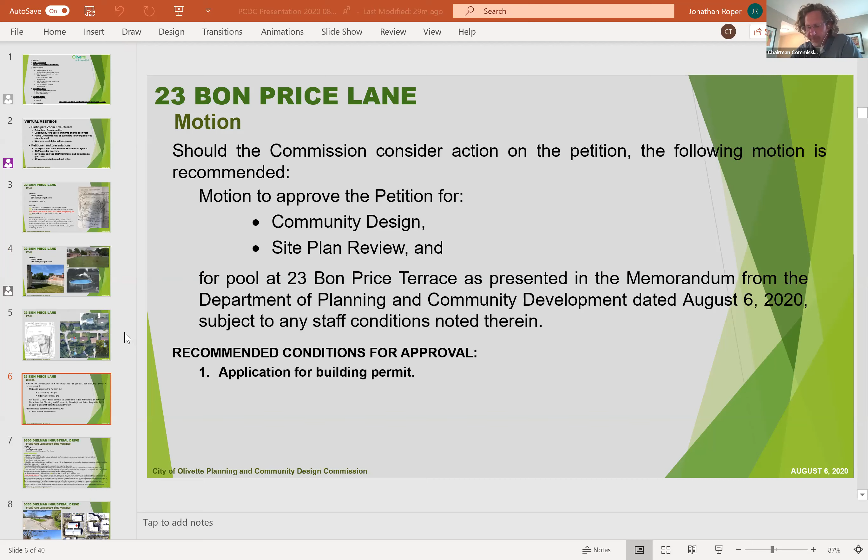Jonathan, I have one question right off the bat - is this an above ground or below ground pool? It's an above ground pool, as the one you see in the bottom right here. Okay, just wanted to confirm that, just wanted to make sure.

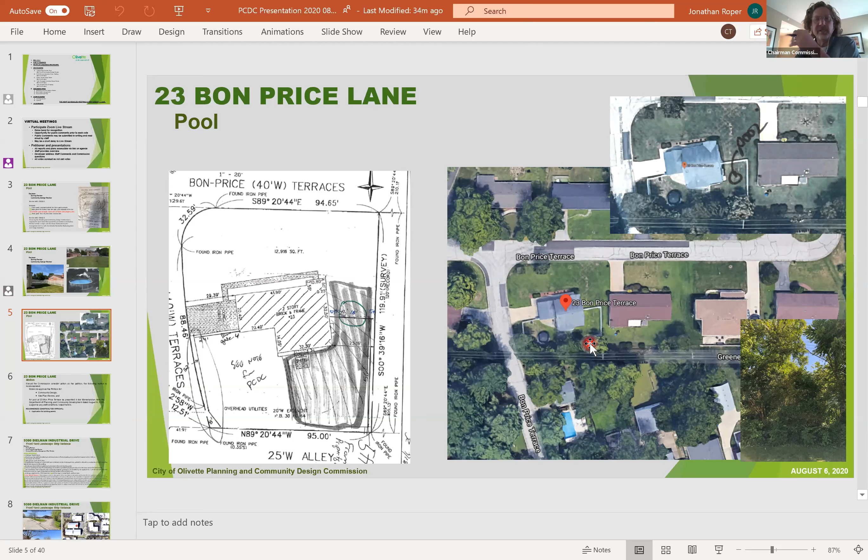I have a question - what is on the other side of the lot? It looks like a circle on it. What is on the other side of where you suspect the pool to be in the backyard?

Which side, sir? I'm looking at the Google Maps of it. It's on the opposite side. It looks like there's a big circle. Is that a trampoline by any chance? Are you talking about this circle here? We have a trampoline on the other side of the house, on the front side, close to our driveway.

Okay, and then my other question is, couldn't you bury that line? We cannot bury the line. It's an Ameren line, it just moved across.

That's all I have, sir. My question is similar to Tim's. Why can't you move the trampoline to the other side of the house and put the pool where the trampoline is?

Where the trampoline is, behind it, is the Ameren electric wire. Ah, okay, thank you, ma'am. Now I understand.

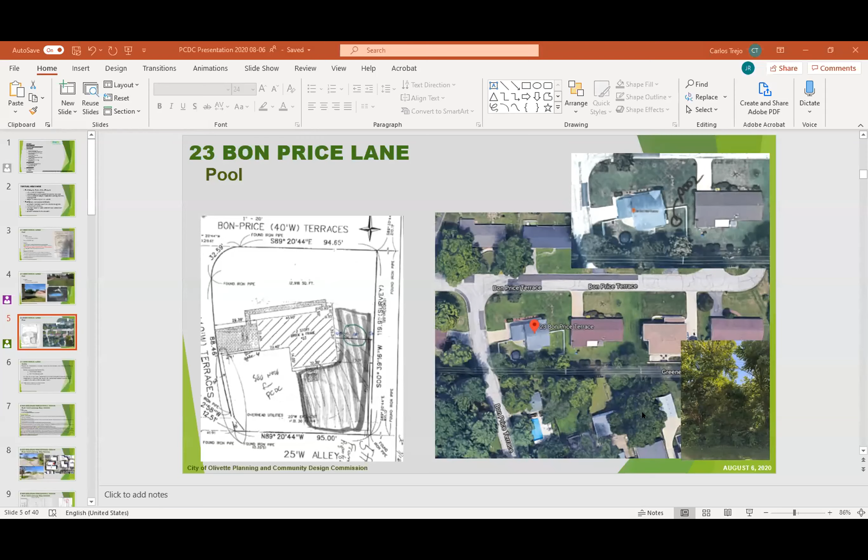I thought the trampoline was away from the wires. If I'm incorrect, let me know. The trampoline can be moved around, but the pool cannot be moved. If the kids want to play on the trampoline, we move it close to the entrance from the driveway, but the power line that runs behind the house, many people are always there all the time, so we really need to give consideration to them doing their job in that place.

Is the trampoline in the easement? What do you mean, sir? Easement? Is the trampoline in the Ameren easement? No. I think if I understand correctly, the petitioner likes the trampoline in that location because they can move it around. So if they're not using the trampoline, they move it away so they have more yard. Would that be a fair statement? That we have more yard. We have more yard.

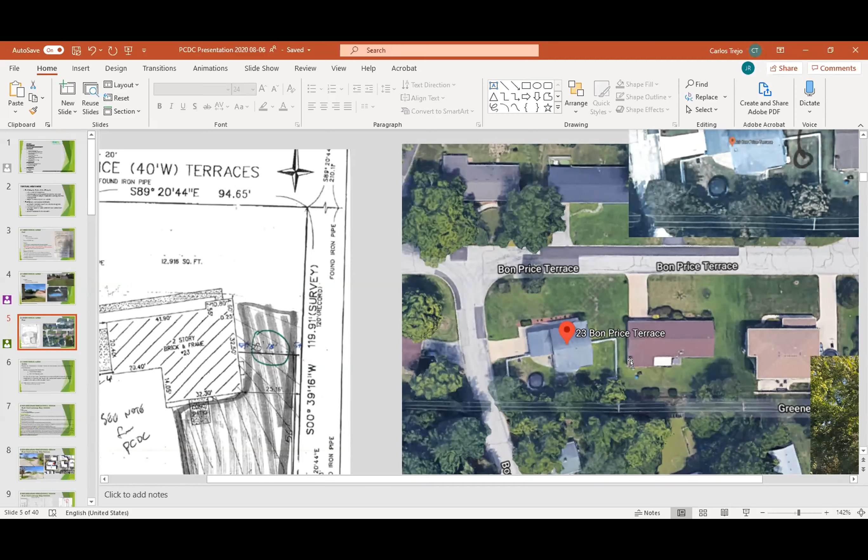Mr. Chairman, go ahead Carol. I think, if I could speak for both of us, what Tim and I both appear to be asking is why the petitioner can't move the trampoline to the other side where they want to put the pool, and put the pool where the trampoline is. So then that would allow it to go for the variance. We just need to get it explained for the record, in particular, why that cannot happen.

Ms. Badness, can you answer that question? The pool, even though it's above ground, is going to be a permanent structure, but the trampoline is not permanent there. If the trampoline is moved back, it's going to be close to that power line.

No, that's not what we're asking. Yeah, so what I'm saying is, if we try to pull the pool down, the pool will be close to the edge of the fence, edge of the backyard where the power lines are. And the pool people said they cannot do a pool close to where there is a power line.

So you've already asked the pool people if the trampoline wasn't there, and the pool was in the location desired to be where the trampoline was, the pool people said that they still could not put it there. Is that correct? Yes, sir, we did.

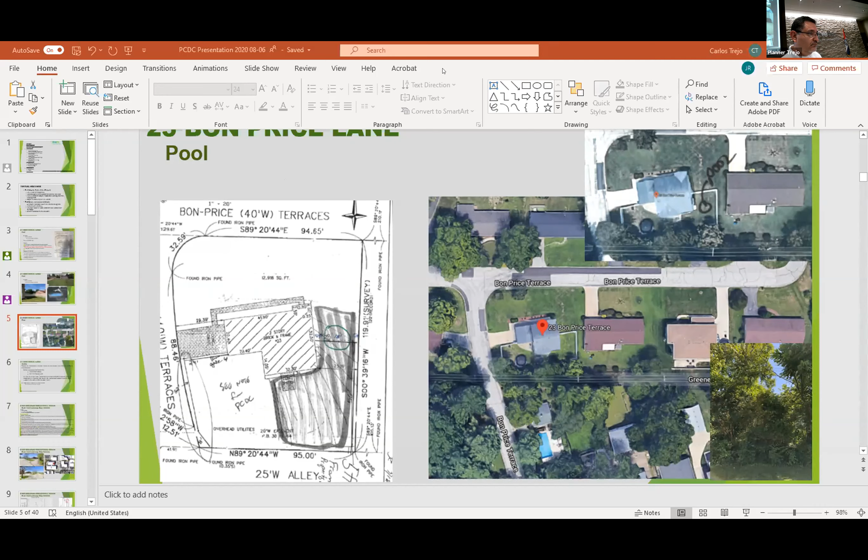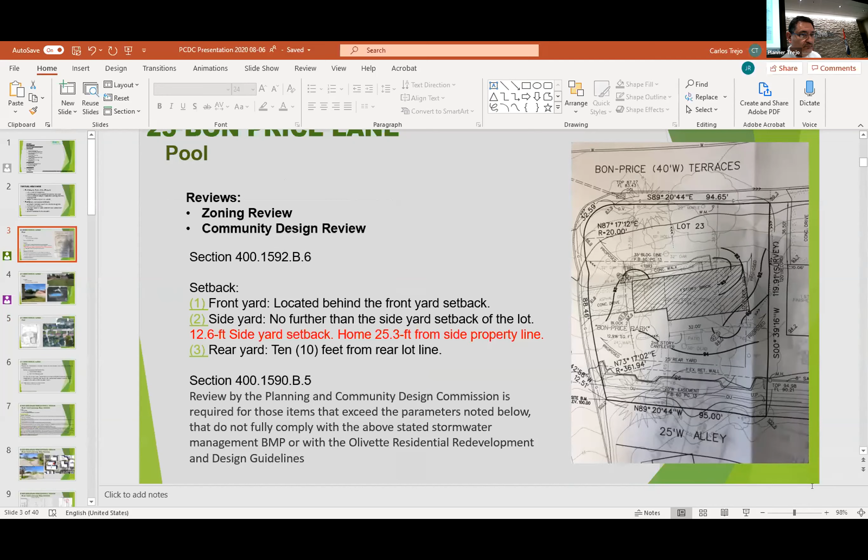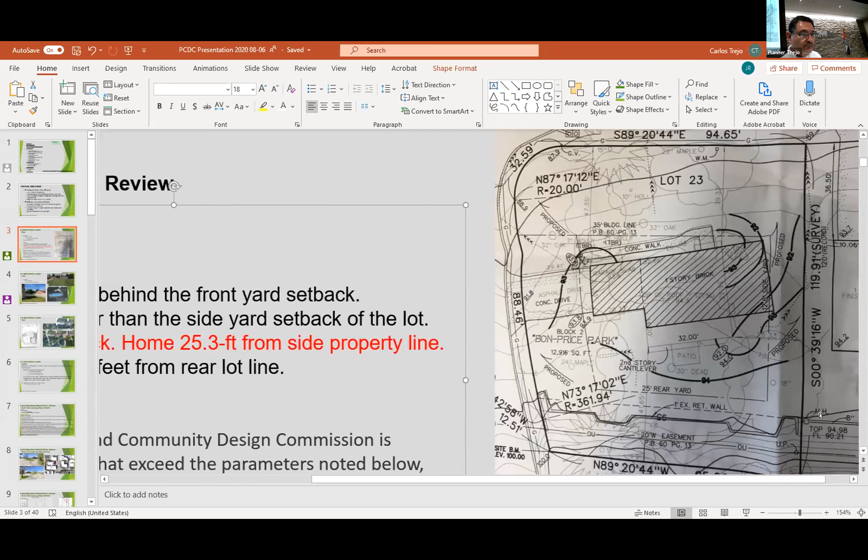Understood, thank you, I appreciate the answer. Okay great, if there aren't any more questions, do I hear a motion?

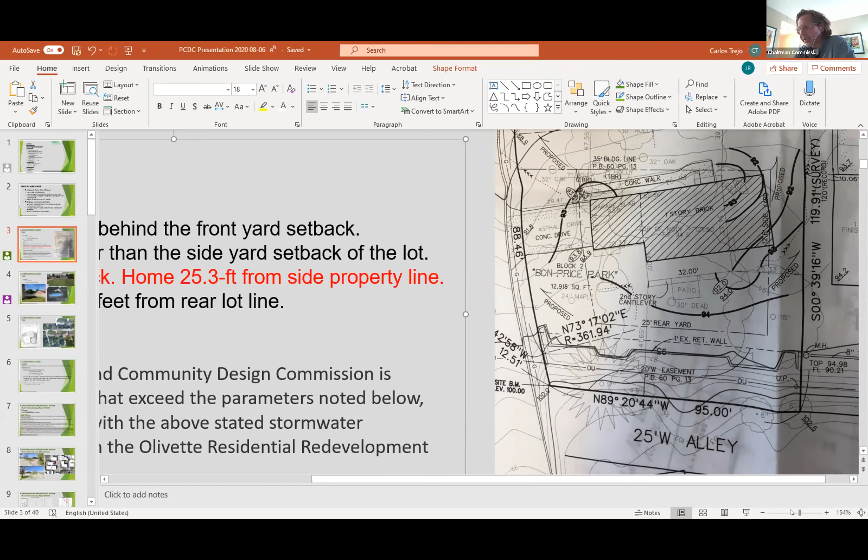Great, do I hear a motion or is there any more comments? Mr. Chairman, I'd like to make a motion. Go ahead, Carol. I'd like to motion to approve the petition for community design and site plan review for a pool at 23 Bon Price Terrace as presented in the memorandum from the Department of Planning and Community Development dated August 6, 2020, subject to any staff conditions noted therein. Motion's been made, do I hear a second? I'll second. Motion's been made by Carol Wagner, seconded by Richard Brophy.

Question, Carlos - since this is a variance request, do we have to include that variance request in this motion? No, Mr. Roper had indicated it's not a variance request for the accessory structure code. It's just that administratively, we don't have the authority to approve the pool at that placement in the setback area. We used to have that authority, but because of the placement directly behind the house, when we amended the accessory code, we made a decision to leave that to the commission through the site plan review process. So there's not a justification for a hardship - it's just a review by the commission to determine whether there's any internal or external impacts that this placement would have.

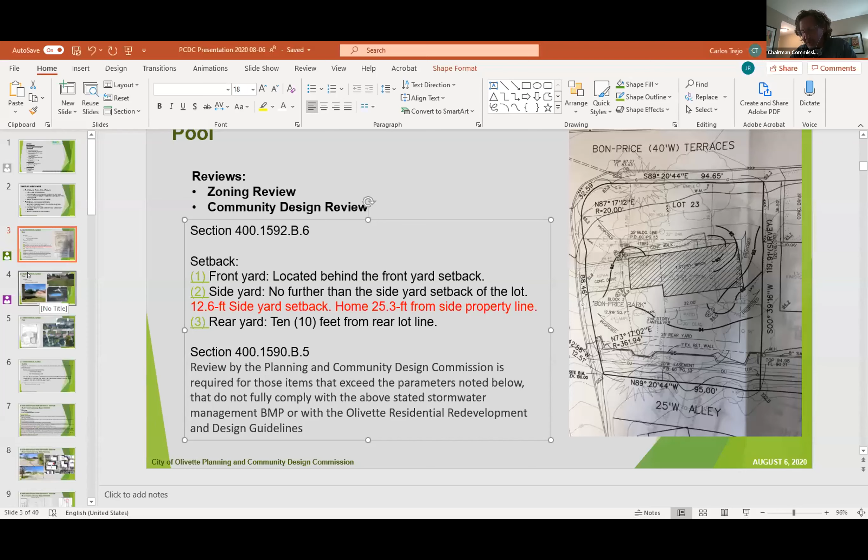We'll move on to item B, which is 9300 Dielman Industrial Drive. Petition type is a variance under site plan review. The variance request is to reduce the required 10-foot landscape strip along Dielman Industrial Drive. The petitioner is Troy Duncan, owner of PK Construction. Property owner is PK Construction Building LLC.

Who's handling this, Carlos or Jonathan? Jonathan, I will take it, sir. Thank you. And I'm going to have to share my screen. Oh, it should be. Or if I can share mine, you have at the top share. For me to share mine. Ah, I see.

All right, bear with me one second here. And could you move the people? Thank you.

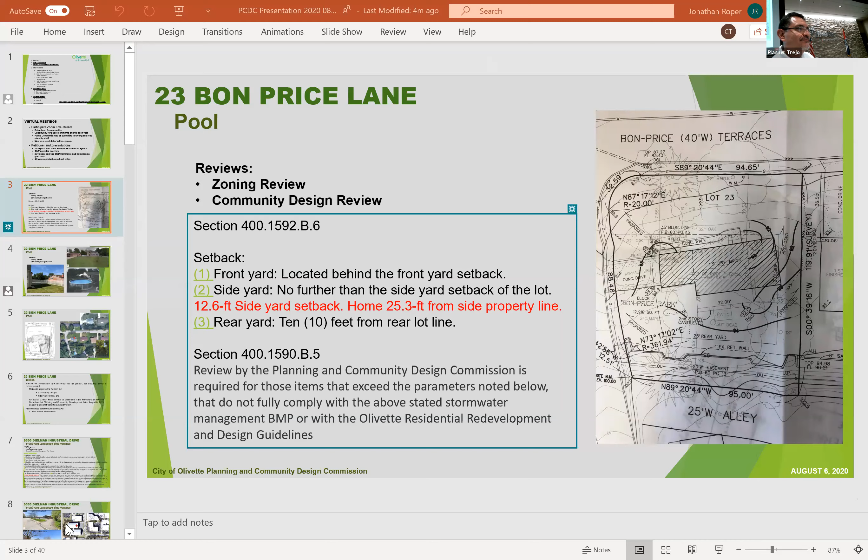Members of the commission, we have the second petition for the evening, which is an off-street parking variation, actually a true variation. Whenever there's a variation, there's a section on your staff report, also on the screen here, that talks about practical difficulties, that they're allowed to vary the conditions of the off-street parking codes so long as to create conditions for both safety for pedestrians and vehicular traffic.

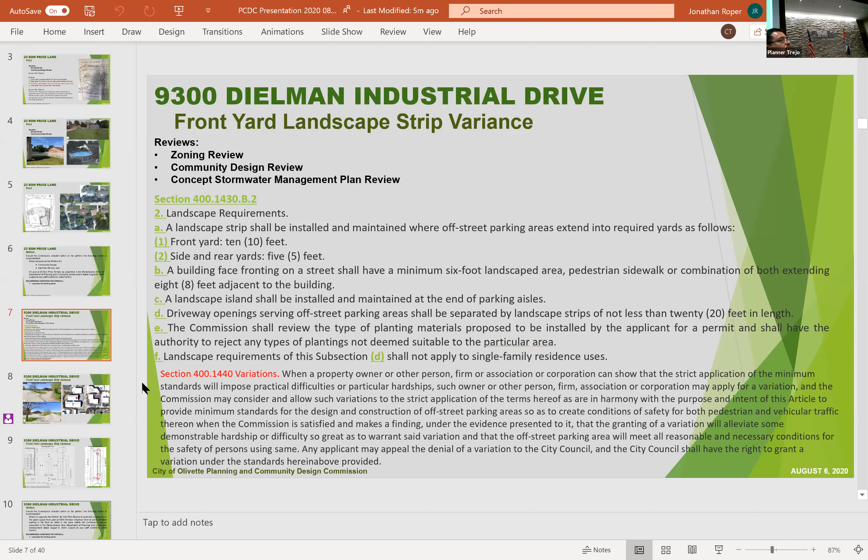So PK Construction decided they're doing major renovations at their property, and you could partially see some. They're just north of the City Hall building at 1140 Dielman Road, where Carlos and I are right now, but they're just north of us in the industrial park. These are the views of the property as they stand today.

They're actually renovating the property, which consists of two buildings. One's an interior building and one was used as parking. Prior to it being parking, it was a tennis club. So when the tennis club left, they made it into a parking garage, and now they're actually making it into, I believe, office space at this point. So they have a need for more additional parking.

The Dielman Industrial has a sidewalk on one side of the road, as you can see, and I'm going to make my pen a pointer in just a second. Where's my spotlight? There we are. So at this point, there's a sidewalk and there's a big green space with a few trees. It looks like the trees are actually dead, judging by the grass being green and the other trees not. So these might be actually dead trees, which staff will need to remedy, of course.

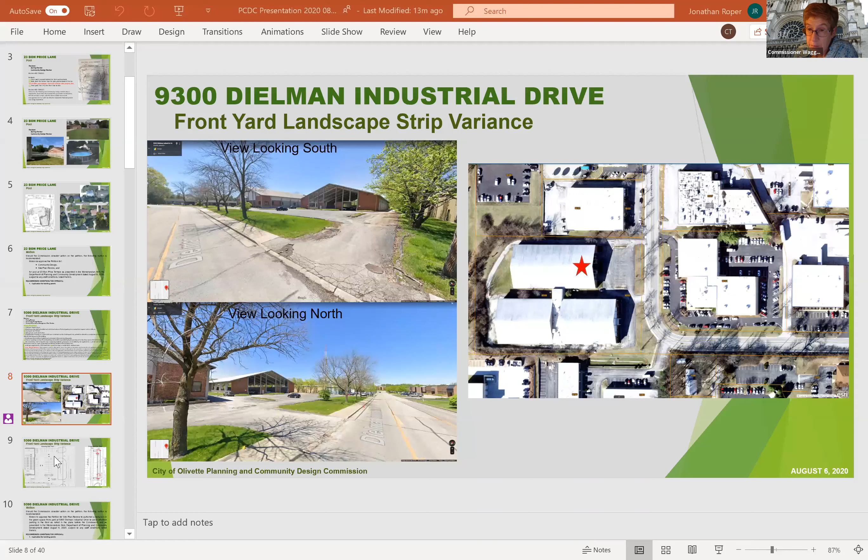Mr. Chairman, go ahead, Carol. I just want to clarify one thing. So along the strip they want to remove, we're talking about 19 spaces, is that correct? I'm checking the floor plan... might be 14 spaces. Right, about 14. Yeah, I show 14. Yes, it's 14, there's a thing right here.

Okay, Chairman, are you still on? I am, go ahead. I do not see a hand raised for the petitioner.

In there... you know, while we're waiting, potentially, I'm looking at another site plan that looks like it has a little bit more handwritten materials, and it looks like it's talking about almost like a landscaping plan, and it looks like it has 19 spaces, and I think that might be why Carol was questioning the issue.

Is that right, Carol? Not specifically, but I just wanted to clarify how many additional spaces they would be creating there. Okay, well I just wanted to clarify that, or at least point that out. Maybe I'm looking at the wrong drawing. No, it's right for dealing. I don't know, I'm going to put it on my screen. Jonathan, I'm not sure if that rings a bell for you as to which drawing this is. Yes, that is... oh, I'm sorry, it's not on the screen. Additional plantings, yes, that is correct. It's the one on the back of your plan set. I'll bring that up in just one second, my apologies.

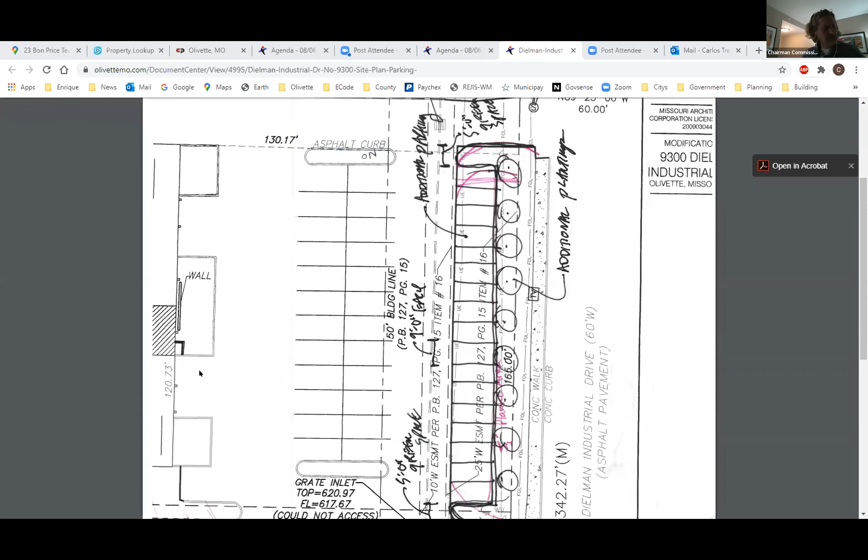That was the initial concept that was submitted before we got the hardline drawing without the additional plantings shown. So there were a couple things we discussed. One was the two apron openings, making sure they had a minimum of 3 feet at the island ends. I don't think the spacings were well defined at that point, before they got a civil engineer involved to draw the second drawing you saw on the dais.

So the drawing we were looking at before is the latest, correct, without noting the additional plantings they would do. Okay, so they're already planning on doing the additional plantings, so good.

Okay, so do we have a member available? Bear with me one second here, let me double check.

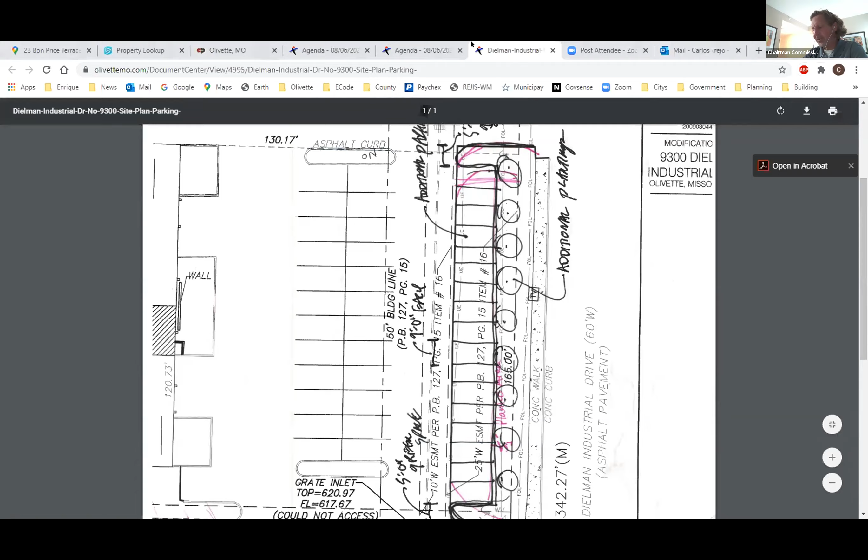Okay, great. So we'll go ahead and defer this for the time being, and we'll move on to item C, which is 508 North Warson Road. Petition type is a site plan. The description of the petition is a variance for fence height. Petitioner is Richard Kellner, property owner is Richard Kellner.

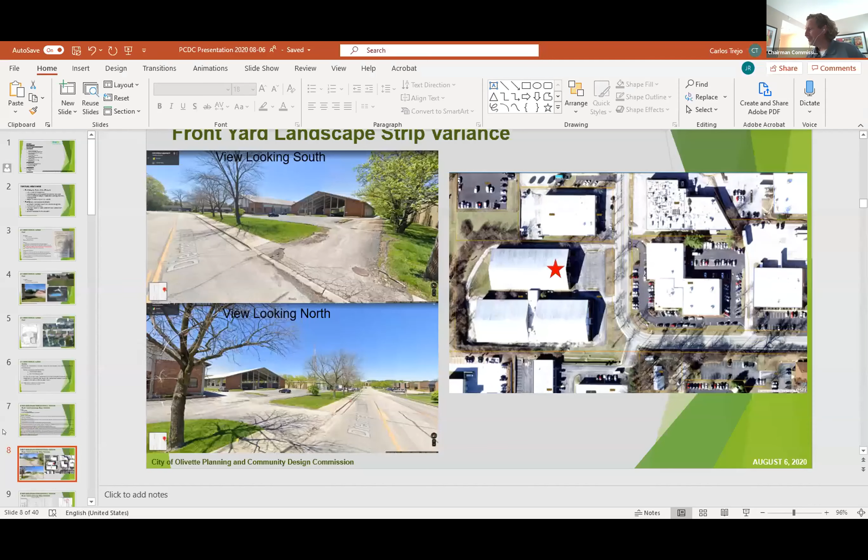Chairman, if you would bear with me, you're moving a little faster than... Oh, I'm sorry, let me get back here. Okay.

Before we go on to this one, I already had a discussion with Carlos regarding this petition. Apparently there were some concerns that some neighbors had, and there was a request for this item to be deferred because there's apparently an attorney representing some of the neighbors adjacent to this. Since we have some potential issues with neighbors, it would be my recommendation that we defer any decisions on this until we've at least heard from that attorney. We can go ahead and go through the presentation, but I'd like to ask Mr. Kellner if he wants to go through this petition at this point in time, knowing that it's likely we're going to defer it until we at least hear some of the concerns from the adjacent neighbors.

So Carlos, maybe if you could bring on Mr. Kellner just to verify whether we want to go ahead and give the presentation or just defer it.

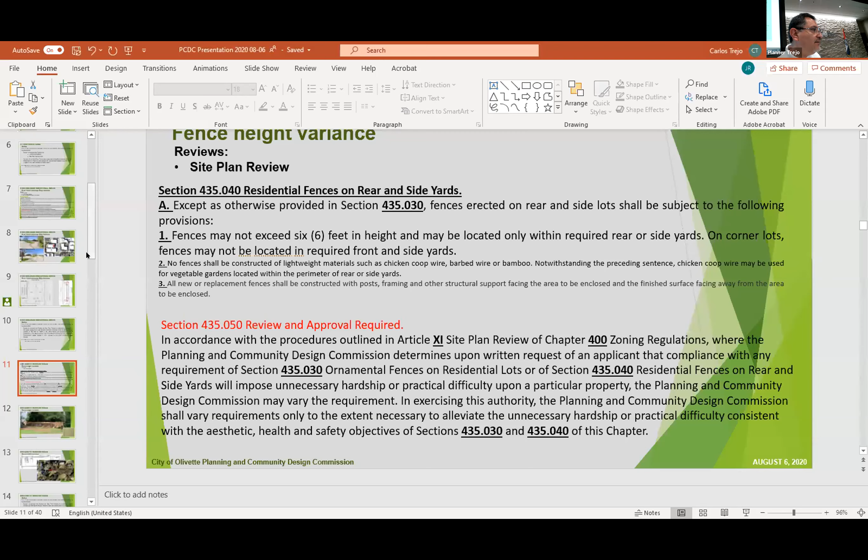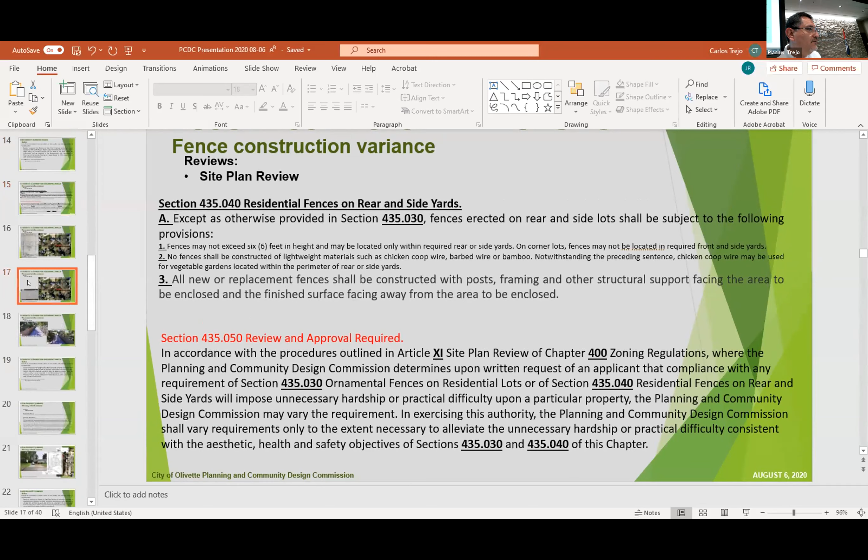Chairman, the next scheduled item is 14 South Covington Lane, also regarding a fence variance request. This one's more for the construction design standards. In review of this petition, we've made a determination that it does not warrant commission review. I'll take you to one of the illustrations in your petition. The property is on South Covington Road, it abuts the Ladue property line, and Cedar Crest Street runs right behind it. The fence the petitioner is placing is a vinyl fence, and the posts are equally visible on both sides of the fence, and therefore it does comply with the city's design standards for fencing. So we've informed the petitioner that this is now more of an administrative review and approval process. I'm going to let Mr. Roper add anything else, and then make sure that if anyone here wants to talk regarding that fence, there is that opportunity.

I'm just going to note, as you're probably wondering, how did it get this far? Why is it in front of you today? In the review process, I believe there was confusion, probably starting from a phone call, and then, two, it was how it was described when it was applied for. That description needed to be clarified, and it was clarified. So at this point, as Mr. Trejo mentioned, it would be administratively approved. At first it was written in a way that stated the structure was on one side and the clean part was on the other, but that's not accurate. So as you can see, the posts are visible, and staff approves these types of fences administratively.

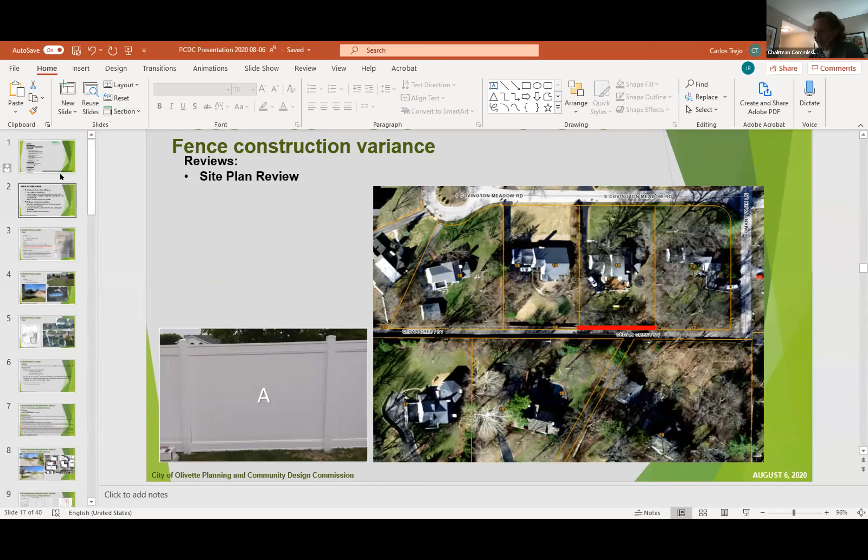Let's go ahead and move on to item 5, discussion items. Item A is Old Bonhomme Elementary School at 9661 Old Bonhomme Road, and I believe we're going to be reviewing plans for new renovations.

So Chairman, we've received notice from representatives of the Ladue School District and Old Bonhomme School of a proposal to do a major interior renovation and addition to the school, along with some associated site improvements. Tonight, we're just introducing the proposal.

It will be formally an agenda action item at your next meeting on August 20th. We have sent out mailers to all the adjoining property owners within 300 feet to give them an opportunity both to listen and read tonight's discussion and then comment at the formal meeting on the 20th.

My hope is just so the commission can get some insights directly from the petitioner regarding what's being proposed, if there's any questions or guidance that the commission can provide both to the petitioner and staff. After that, again, we welcome their participation in this process.

What I will first do is note, in the review of these things, we've talked to the school district along with their representatives about some important community values that we take into account during petition reviews. Their property is zoned PA Public Activity District. It is a non-residential zoning district, subject to only site plan review. The use is permitted by right, subject to site plan review.

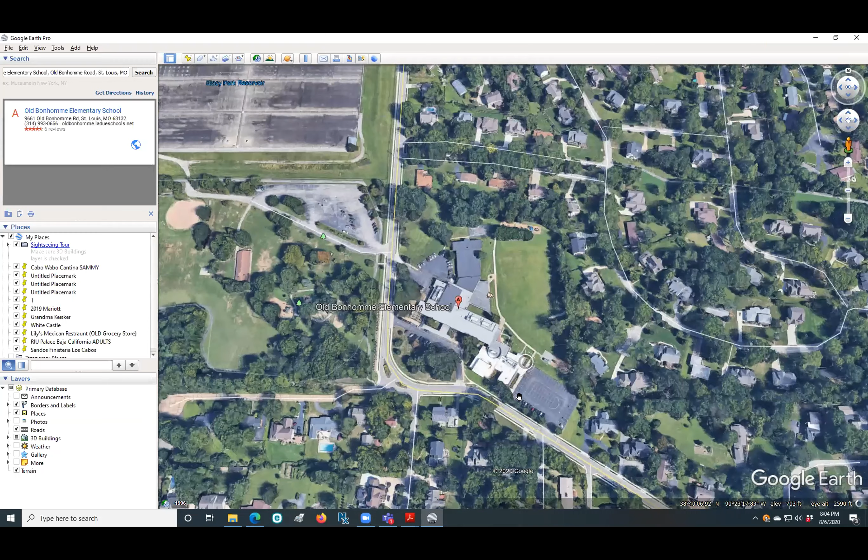All right. I thought I'd just start with this Google image. I'm sure you're all familiar with the school. The school was originally built in the 1950s. This is the original school, I'm kind of running my cursor around, and then there's been a couple additions that have occurred over the past few years. This small addition was built in the 90s. There was an addition that was built in 2002, and then the most recent addition built in 2008.

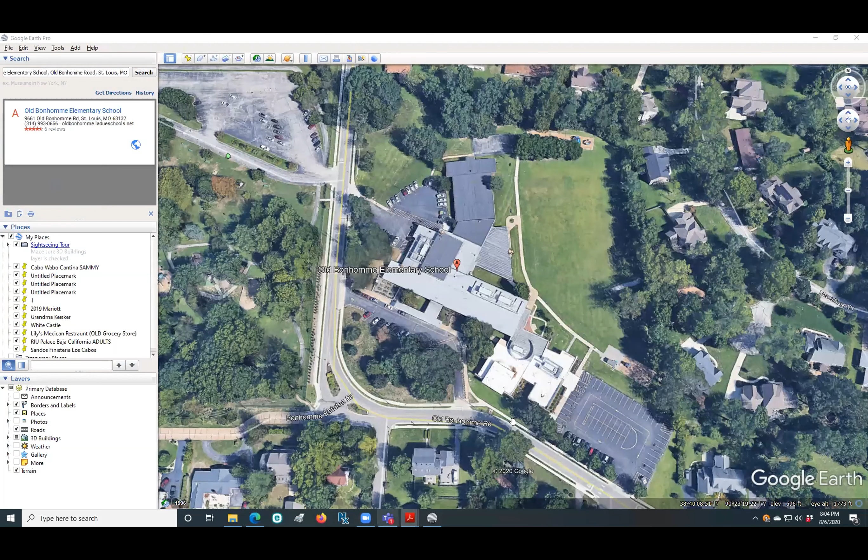So I'm going to go see if I can get this pulled up. Come on, for some reason my PDF does not want to open. Apologize, I'm going to try to. Oh, here it goes. Okay.

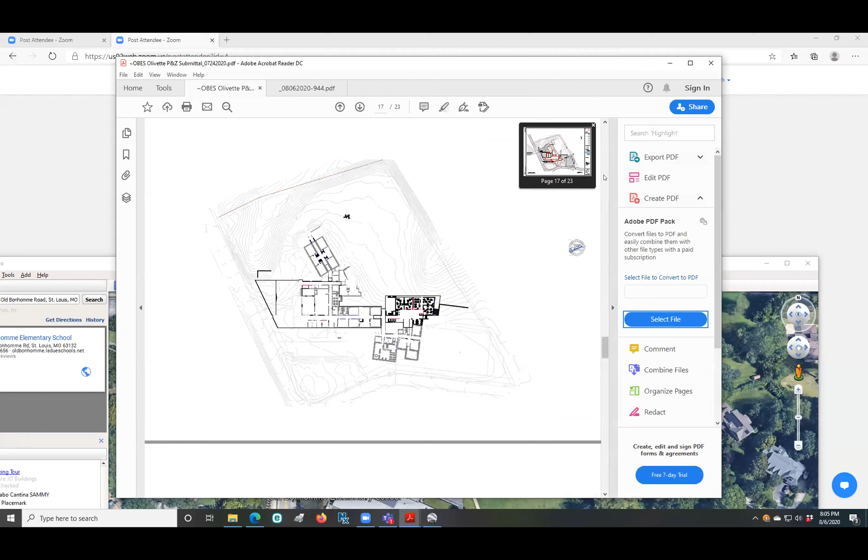So I thought I would start with the floor plan, because that will kind of inform why we have additions where we do. So again, this is the building floor plan.

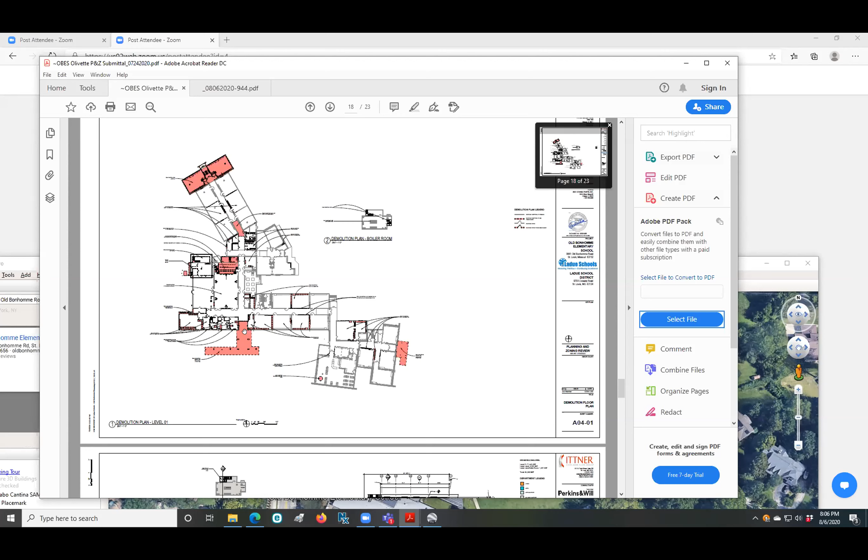We're working on 3 buildings. In this particular building, there's very little demolition work that's occurring, but we are doing pretty significant renovation inside the building. This north addition is currently a two-story addition on the far north end of the building. That's being demolished, and you'll see some of these canopies on the front and east end of the building are also being demolished and replaced. Inside, there's selective demolition going on based on how we're renovating the space.

So this is the floor plan. The two main additions are this addition on the east, which has two floors - the upper floor is at the same level as the main floor of the building, and then there's a lower floor, you go down about 14 feet, tucked in on the backside of the building. We wanted to keep within the character and low profile of the school, not increasing the height as much as possible. Then over on the far west end of the building, we have another addition where we're expanding the administrative offices and building a storm shelter.

That's a new requirement in the 2015 building code. With schools now, you have to provide a storm shelter that has the ability of housing all the students and teachers, and it has to resist a 250-mile-per-hour wind. This whole area is part of the storm shelter because we have a gym and a stage. As part of those requirements, we also have to provide restrooms, and there's mechanical ventilation and other mechanical electrical systems required for that storm shelter.

And how we're setting up the school getting renovated, each grade is a pod with 6 rooms, and they're going to more of a future ready school. Some of the classrooms are more traditional, and some are going to be more open with flexible and adaptive learning spaces. We took that approach in this 2-story addition, and in the interior of the building we're also doing the same thing with the existing classrooms.

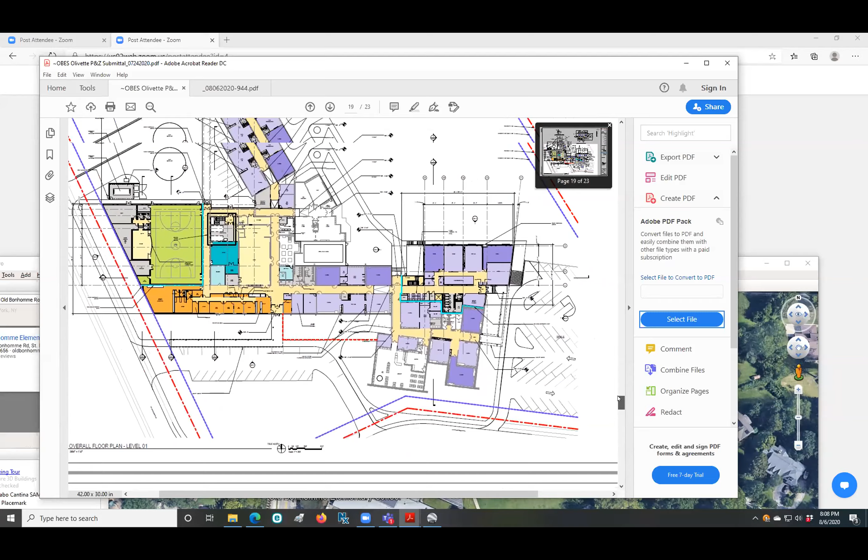We're redoing this parking lot. What we're trying to do is improve the conditions that occur during pickup and drop off for the school, and trying to get more cars off the road. So we're expanding this parking lot to the north and trying to encourage more people to line up and stack on the parking lot. To help do that, we're proposing another curb cut that would be right-only out here. This will allow much better circulation and allow a lot more cars to get onto the site and off the main road, helping with traffic along Old Bonhomme Road.

In the front, we're not doing a lot, but we are rebuilding that canopy that I mentioned earlier, and the canopy is getting longer. Again, that'll allow more cars to pull up farther and get more cars off the road. And then we're adding a bus pickup and drop off area in the back.

One of the comments we had from the city in our early preliminary meeting was that these curb cuts with the park and the school aren't lining up. So we've relocated this so they're more in line, and we think that's going to be a much safer condition for cars and people traveling across the road there.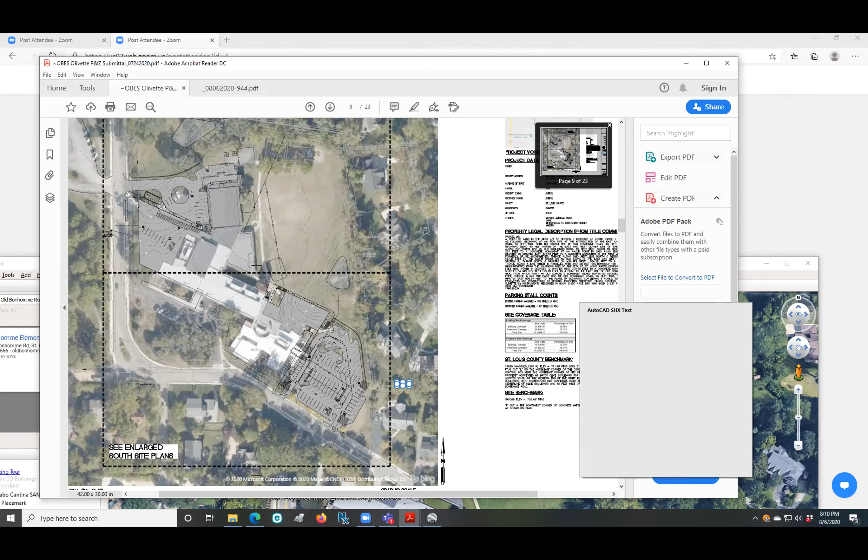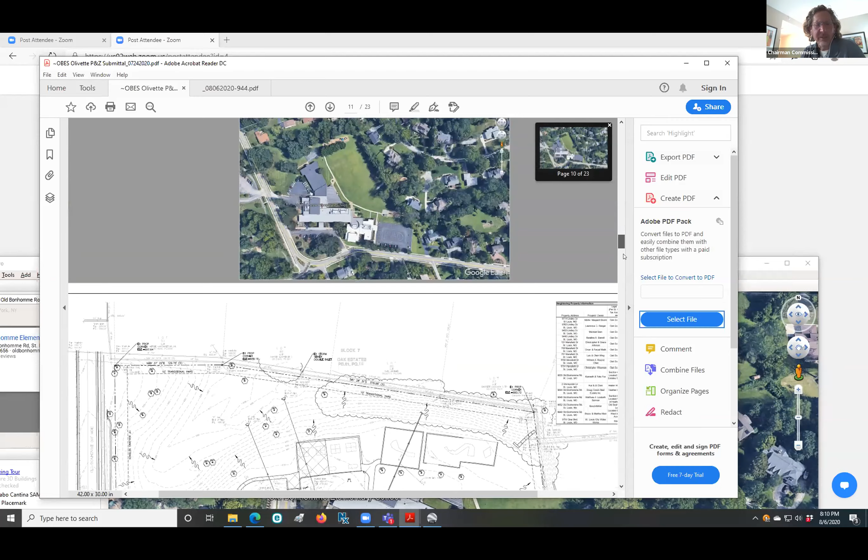I just have a quick question, about the bus turnaround - how many buses can you get in there, and will the buses be stacked up out on Old Bonhomme or potentially in Stacy Farm? I think we got a better view of that on a different site plan I'll get to here. I think we have 6 or so buses. This will come up here in a second.

So you see them here. Our civil engineer is in the process of studying the turning radiuses, but we think these buses will be able to make that turn, and if not, we can expand this a little bit. This will also be the point where we have trash, and our deliveries for the kitchen will all occur in the back end of this building.

In the back, is there a way to get down with a ramp, or is it all stairwells back there? Which portion are you referring to? If you move your cursor to the right, there's a stairwell in the back end of the property. Yeah, there'll be a vestibule here, and I believe there will be a stair built into this vestibule that'll get you down to this level.

But can you walk all the way from the other parking lot where the carpoolers come, all the way to the back? Yeah, you could go along this sidewalk, and we could add a connection here so you have a continuous path to get over to this side, if that's what you're asking.

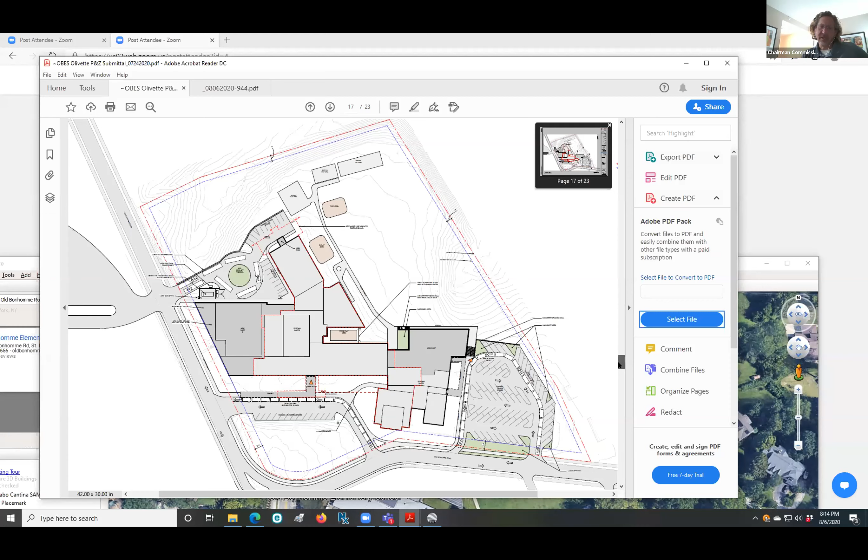I got one other question on the site plans, and that's the parking lot. It looks like you've got two lanes going in, but only one lane going out. Yeah, I'll show you — this plan is more up to date, and we do have a wider lane now on this plan, where it has the ability for cars to park here, and if need be, a car could pass by. Okay, great, that makes sense.

Probably premature, but I'm curious about the timeline for this, or if that's even able to be discussed now. Yeah, that's something we're in the preliminary planning stages on, so that's in the works.

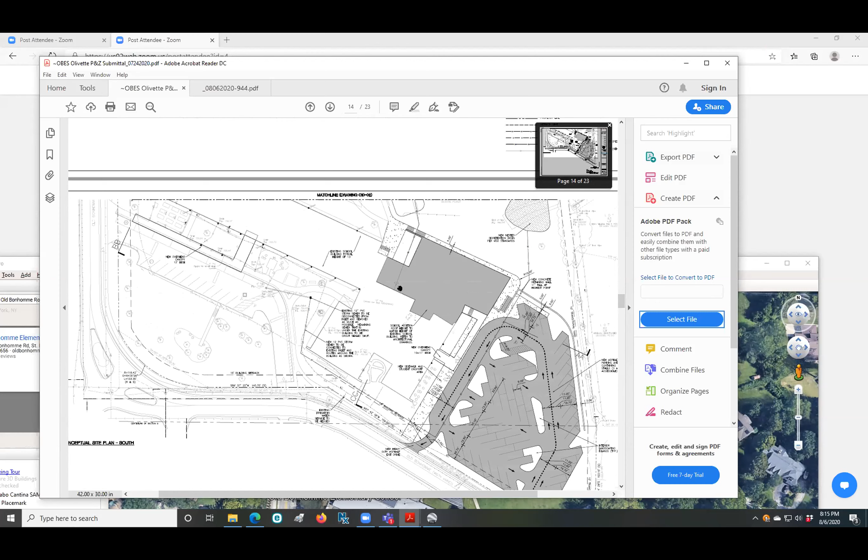Any other questions or comments? Does Old Bonhomme have any children with accessibility issues who can't do steps? Well, we do have an elevator in the addition that allows kids to get down to that lower level, and once complete the building will be fully accessible.

And let me go back to the floor plan. One improvement we're making inside the building.

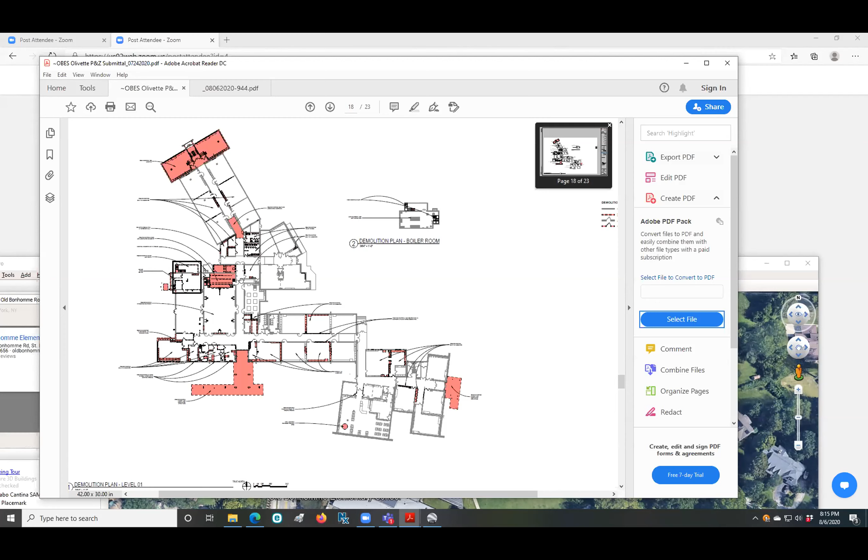So you come in the main door here, there's a little bit of a ramp here, which is fine, and it gets you down to this level, which will be our main level or upper level of this addition. There's a ramp in the back of the building, and it's shown as red because it's too steep, so we're demoing this out and making the ramp longer so that it complies with ADA. When we're all done, the building will be fully ADA compliant.

I'm going to go ahead and show you a few views of the exterior of the building.

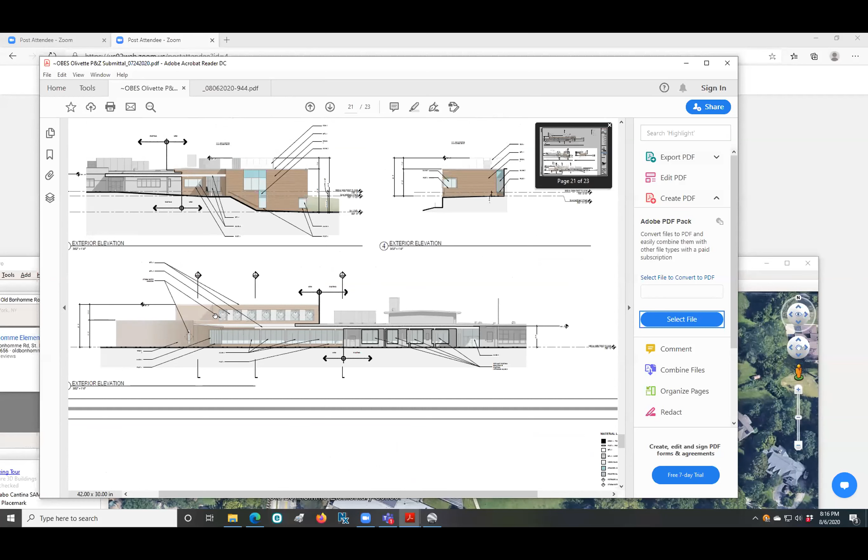This is a partial view of the front of the building. You're seeing the existing gym in the background, and the front door is approximately here. The windows in the front of the building and the administration are getting redone, and the administration wing is getting longer. In the background, you're seeing the new gym and storm shelter, which is a bit of a taller structure.

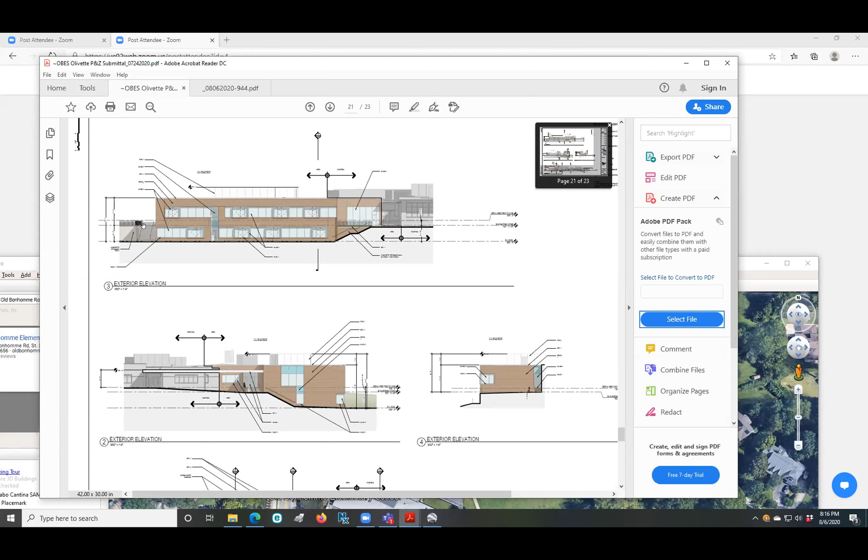This is the back of the East Classroom Addition. Again, this is the main level that's in line with the main level of the building, and this is where we're dropping down. You see the steps on that far east end we were just looking at. You're down at the same level, and you go back up some steps over at this area to get you around the site.

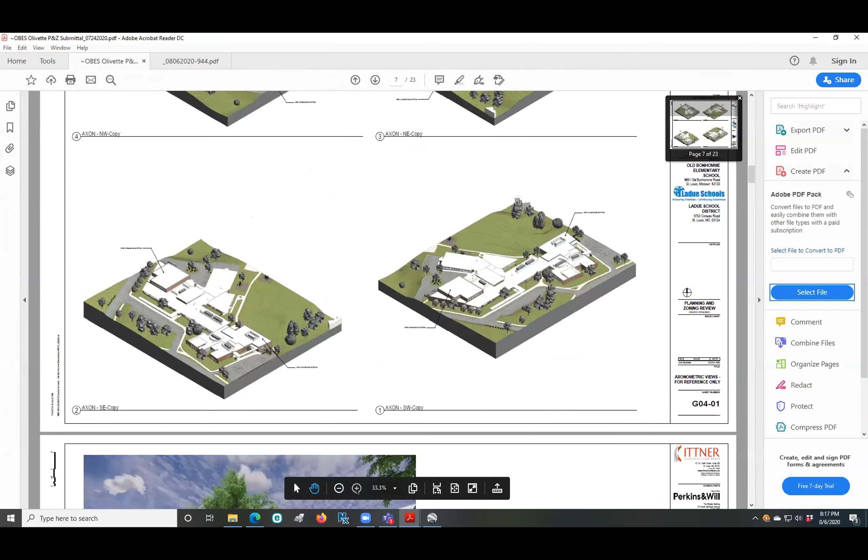And these are some isometric views. Again, the addition starts right about here. This is our storm shelter, this is the west elevation of the building, and then our east addition is on the far right side here.

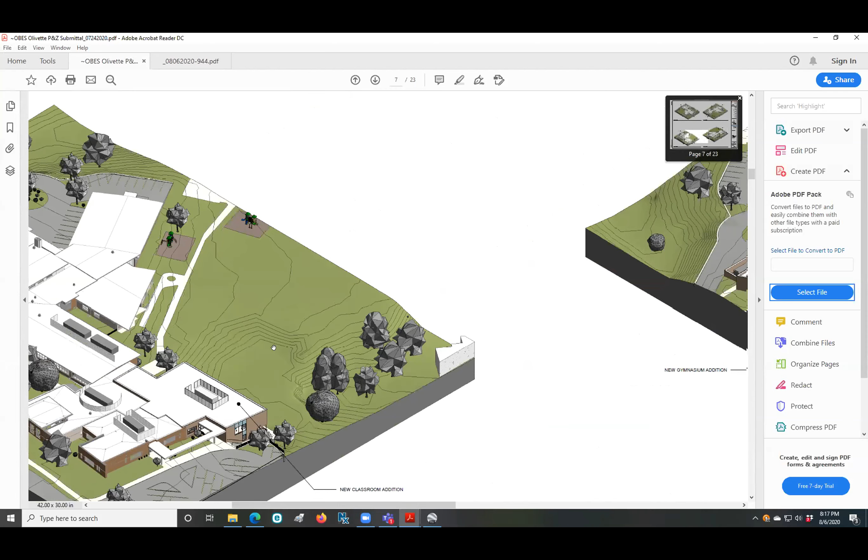Again, a view looking from the other direction. This canopy is being redone here, so this is that car drop-off area that we were looking at earlier. And here's another view of the storm shelter looking from the other direction.

The materials of the new additions will match the existing buildings. We are looking at using a thin brick for this addition in precast panels. Our construction manager thinks that's the most economical way to build that structure. It also has to resist that 250-mile-per-hour wind, so it needs to be a little more robust. The other nice thing about building this out of panels is, with the building getting closer to the road, it'll allow the building to be constructed quicker and have less disturbance on the site, which we think will be a safer way to go.

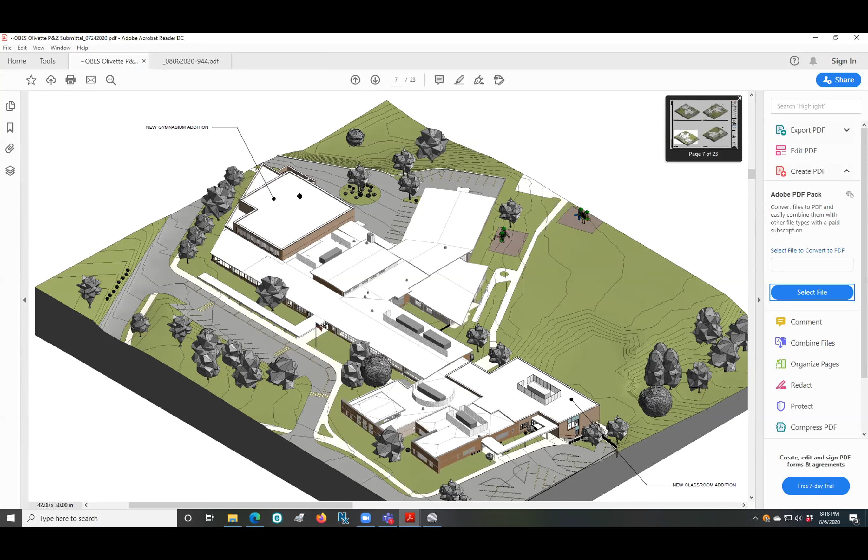What about stormwater retention? Where are you guys going to be with that?

Let me zoom out here. I don't know, Carlos, if you have the ability for Stephen or John Falk, our engineers who are on the call, if you could bring them in, he can speak to more detail on our stormwater management system. I think Stephen just raised his hand.

Hey Carlos, can you hear me? Carlos, you're muted, if you don't know. My apologies. No worries. When I transferred the remote screen to you, Rick, you have control of who you want to bring in from the attendees, so I apologize. If you right click them, you can add them as a panelist or unmute them. Where do I do that? If you scroll, you should see a place where it says participants. Once you click participants, there are two columns: a panelist column, which has 13 — you're part of that panelist column — and an attendees column, where you'll see Stephen. Stephen, right now he's muted. Can you hear me? Yes. Cool.

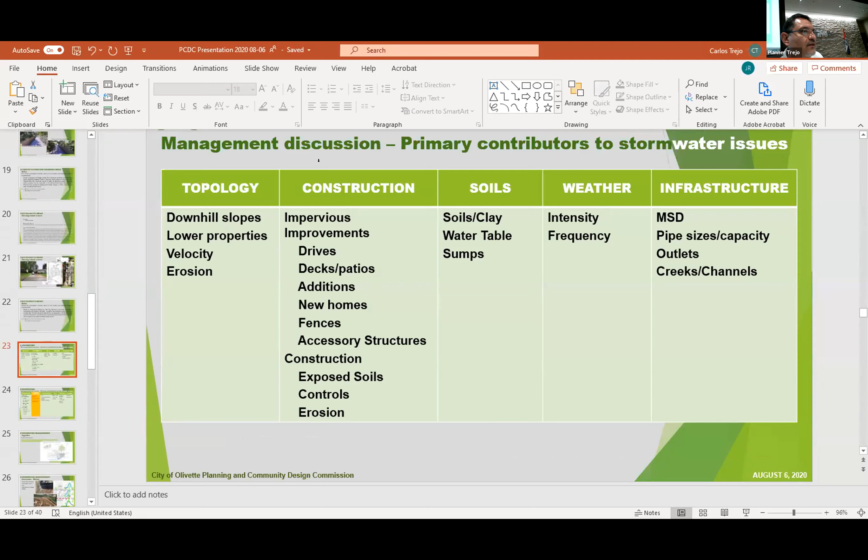One of the major issues that we try to address at a staff level is stormwater and its impact to surrounding properties, both during new construction, through all types of improvements, whether they're additions, flat work, grade alterations, decks, accessory structures. What we're trying to do is prepare a stormwater plan that will assist us in prioritizing and developing a strategy on developing best management practices to address many of these issues.

What I'm showing on the slide at this moment is identifying the primary contributors. I'm not saying that these are solely all of them, but these are the primary contributors to stormwater issues: topology, construction, soils, weather, and infrastructure.

We've tried to provide some descriptions of what exactly within these contributors there are. You know, with soils, it's a low water table, the clayish soils that we have, sumps during construction, impervious improvements like decks, patios, additions, new homes, fences, or even construction practices such as exposed soils, lack of controls, erosion. We're trying to develop ways to address this in a holistic fashion and prioritize.

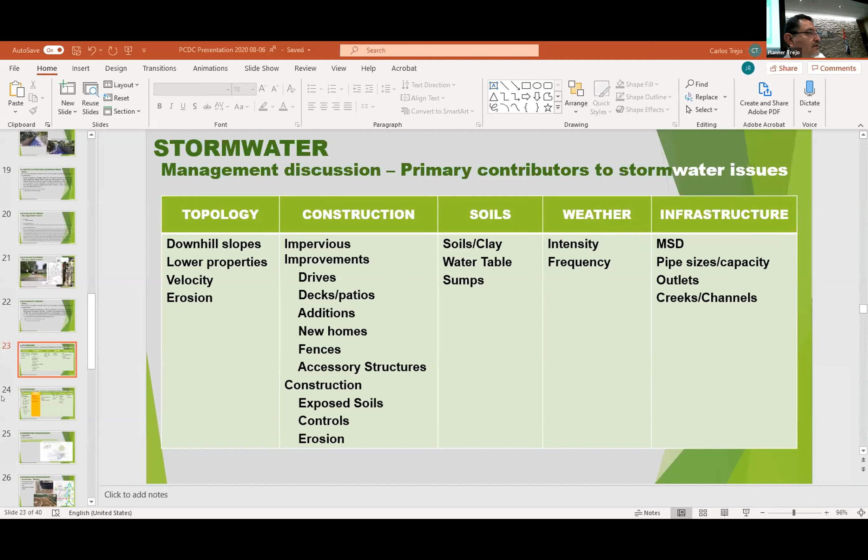I'm not saying that these are solely the only contributors, but what are some other primary ones? So far, at least up to this week, we have identified one more that we continue to hear a lot about, both at an inspection level, at a staff level, at our planning level, and at the commission level, and that's the loss of vegetation. So when somebody complains about stormwater, it's generally about one of these items: construction, the loss of vegetation, infrastructure, soils, topology, or weather.

The goal is, again, to identify the activities within each one of these contributors to get a good understanding, making sure that it's all encompassing, and then develop strategies in how those would be addressed. Some of them will be ordinance changes, some will be policy, some will be long-range emphasis on doing things differently, or trying to get other agencies involved.

So that is the process we're taking a look at. I think once we have consensus from the commission that if there are any other contributors we would like to add to this list, we will spend the next couple of meetings on each one of these individually, identifying what activities within these contributors cause that stormwater, and what are suggestions, methods, mechanisms to address the activities that cause that stormwater.

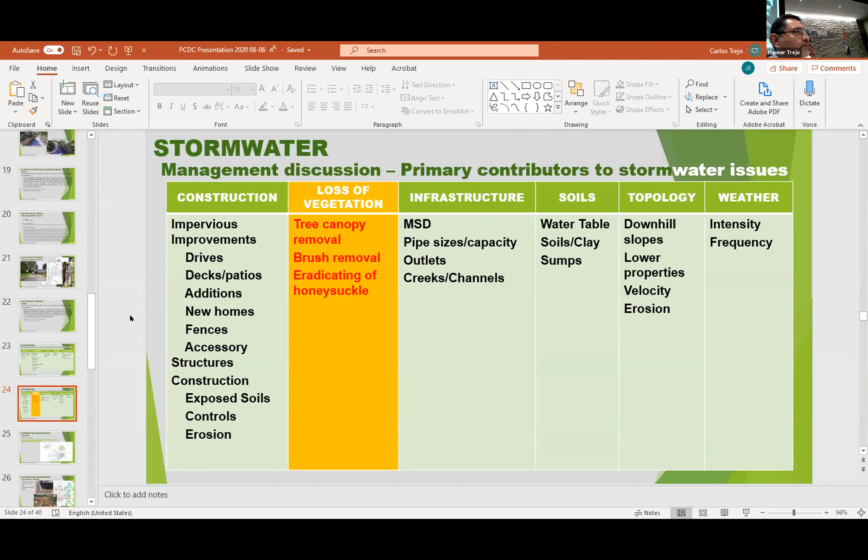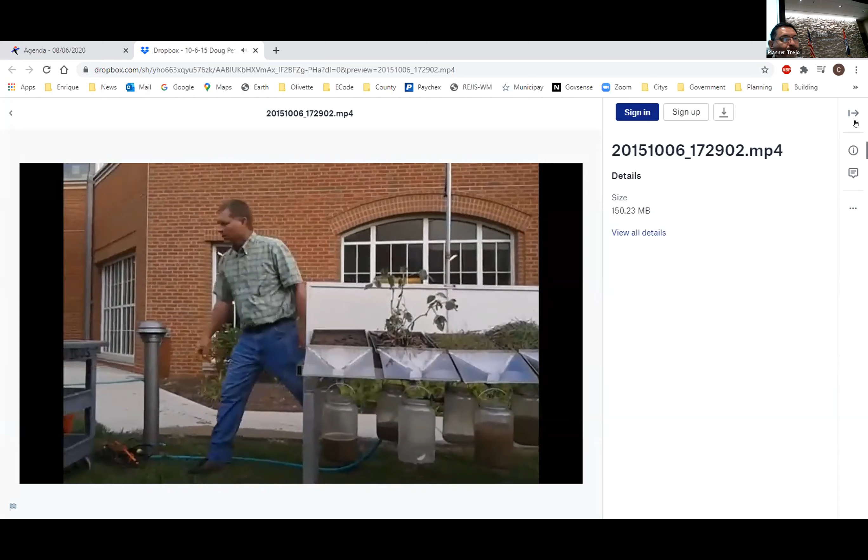How much did it rain? Great question - this side is about 7 or 8 tenths, maybe. This side's more like about 9. That was a really hard rain. Does it always rain easy in your part of the world down here? You guys never have hard rains, do you? So do we want to capture only the easy rain, or do we want to capture all the rain? So we want to capture all the rain, right?

So let's take a look at it. Now let's start on here. We'll start on this - come on, that's my favorite. So we're gonna do a little something here.

If we let that settle, there'll be about that much soil in the bottom. Here's the crazy thing - we might have gotten a little infiltration, only you're seeing it doesn't come up here. You can actually see in this gray - it's only a foot and a half long. We had soil that actually moved from here to here.

If you look over here, here's our crop - it has an annual crop every year. This is infiltration, and there's a lot of bare soil in it. So it's not just the fact that it's bare soil - it's a combination of the health of the soil and the aggregate stability.

Aggregate stability is a term I want you to understand before we get out of here. You look at the surface of this, there were clods all over it. There's a few left right here, but most of them dissolved, just like this, didn't they? It's completely gone, and it was much bigger. And it didn't have any force of raindrops, did it? It was simply sitting there.

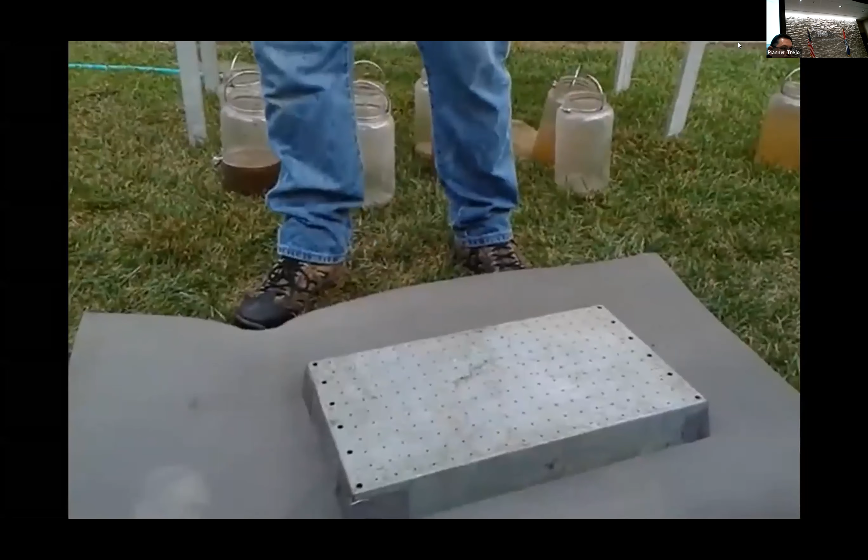Just right in the end, 8 inches, whatever.

Because there's no aggregate stability in the pore spaces, we fluffed it up and added pore space, but when the water hit the soil, it collapsed and sealed it over. All those voids in the soil were sealed completely over.